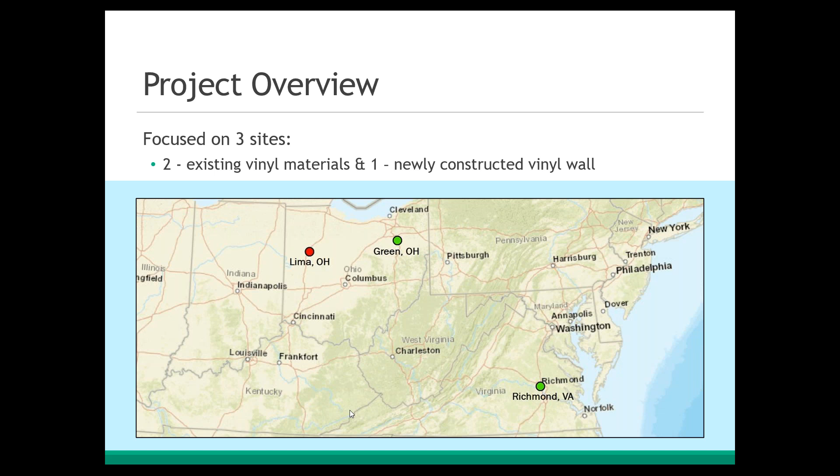So after considering numerous sites, we ended up settling on 3 to focus on for the study. The 2 dots there in green, one was at Green, Ohio, and one was in Richmond, Virginia. They had existing structures made of vinyl materials. And then the red circle there for Lima, Ohio, that was an empty site where we ended up constructing a brand new vinyl noise wall to test out for the project.

So for our research objectives and goals, the primary goal of this study was to evaluate the acoustic effectiveness, cost feasibility, and overall benefits of using vinyl materials as a viable option for noise mitigation.

To accomplish this goal, locally sourced vinyl material was constructed and tested as a noise wall. We picked an ODOT site up in Lima, Ohio, right along I-75. This is a photo of the wall we built, with I-75 at the top of the photo, and you can see a couple of the noise meters there from when we did the acoustic testing.

In addition to acoustic testing in Lima, Ohio, we also tested existing vinyl fences in Richmond, Virginia, which had the same material as what we used in Lima, and in Green, Ohio, which had a different material. Both Richmond and Lima also had nearby concrete walls, so we could get a good apples-to-apples comparison of noise impacts.

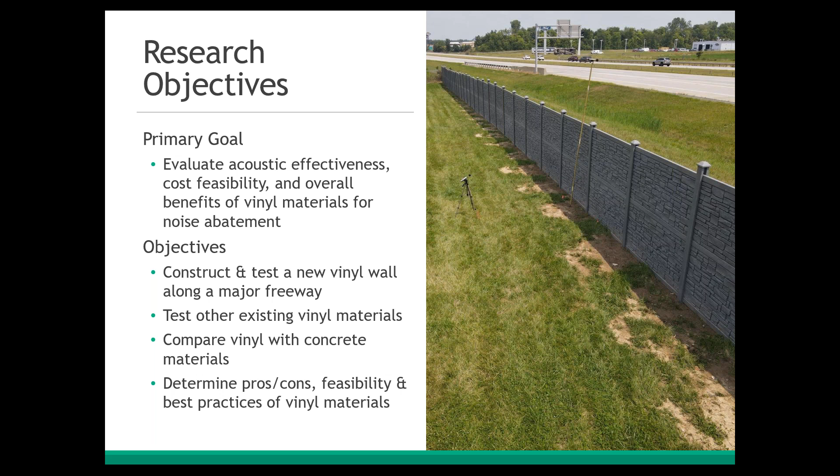These comparisons help determine the advantages and disadvantages of using vinyl materials as noise walls, and helped us gain a better understanding of available vinyl materials and the feasibility of the products for noise abatement. The research also identified some construction best practices when using vinyl materials for noise walls.

Here's a quick overview of the approach we followed. For step 1, project management, that was lots of regular meetings, and today's presentation was part of this step. Then step 2, we did a pretty comprehensive literature search and evaluation of what had been done previously.

Step 3 is where we performed the acoustic testing at the 3 locations, one of which we built the noise wall. Step 4, we performed data analysis and some modeling on the acoustic testing results. Then from all that, we prepared recommendations and conclusions, drafted the report and fact sheet, finalized it, and prepared a research article for ODOT's newsletter.

So those were the major steps that we followed for this project.

Looking a bit more in depth at a couple of these steps, first for step 2, the vinyl material literature search and evaluation: a literature search of existing research was performed to collect information on previous studies on vinyl noise barriers and to identify best practices that could be incorporated into this research project.

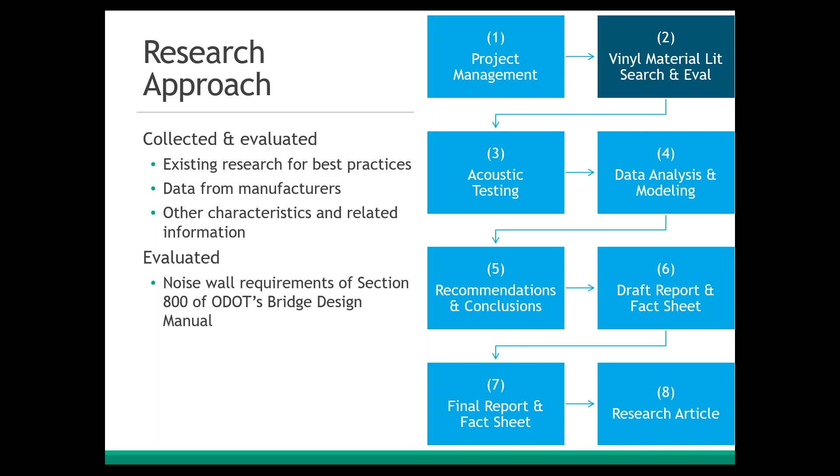Data on the vinyl materials was also collected from the manufacturers, including cost and production time. Additional characteristics and other related information on vinyl materials were inventoried and compared. In addition, we evaluated vinyl material characteristics against the noise wall requirements in ODOT's Bridge Design Manual in Section 800.

For acoustic testing, we split it up into 2 parts. The first one was building the test noise wall, and the second part was the acoustic testing.

When we built the noise wall, first we had to pick a site. We looked at a total of 16 sites around Ohio and evaluated them for construction feasibility. From this evaluation, we picked 2 sites, but after some challenges arose at one of the sites, we ended up building on a single site in Lima, Ohio.

That was an ODOT property, so we had easy access. It was right along I-75, so it was nicely located along a major freeway. That's where we ended up building our noise wall.

Once the vinyl fence materials were manufactured and shipped to the Lima site, the construction contractor installed the vinyl noise wall following the manufacturer's installation specs. Professional construction management services led by Capstone staff, assisted by ODOT and us, documented the installation process, best practices, and challenges observed during construction.

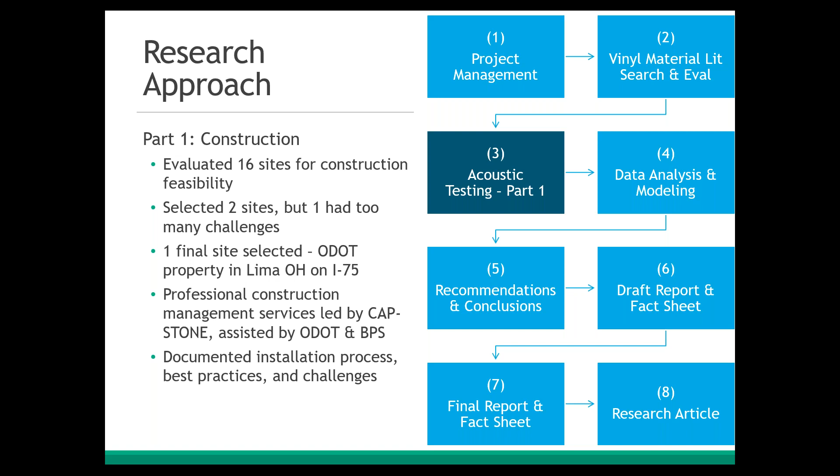Here's just some photos taken during the construction process. First, here's what the panels and posts looked like when shipped to the site. They were shipped in these packages all ready to be assembled. Here's a close-up of that package, showing the posts and the panel support brackets already attached to them.

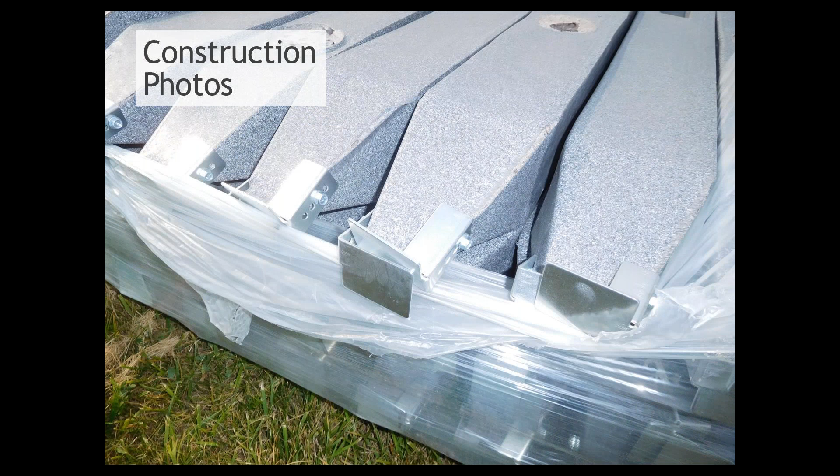Here you can see the very first post has been installed, and on the right side of the photo you can see the auger being used to drill the hole for the next post.

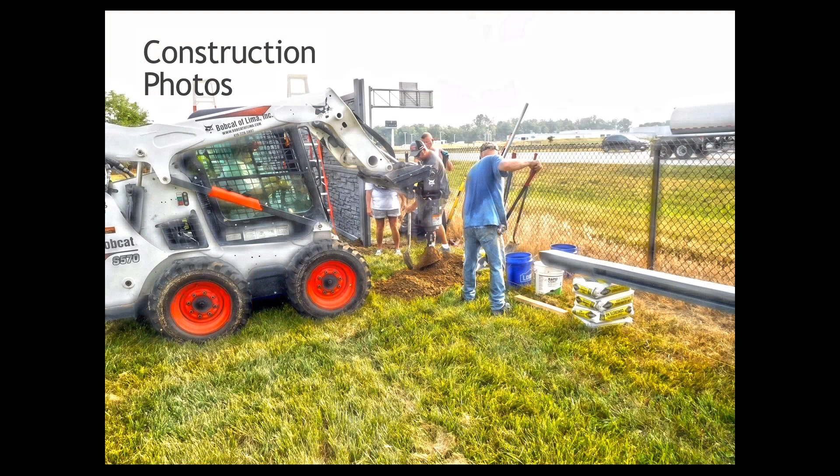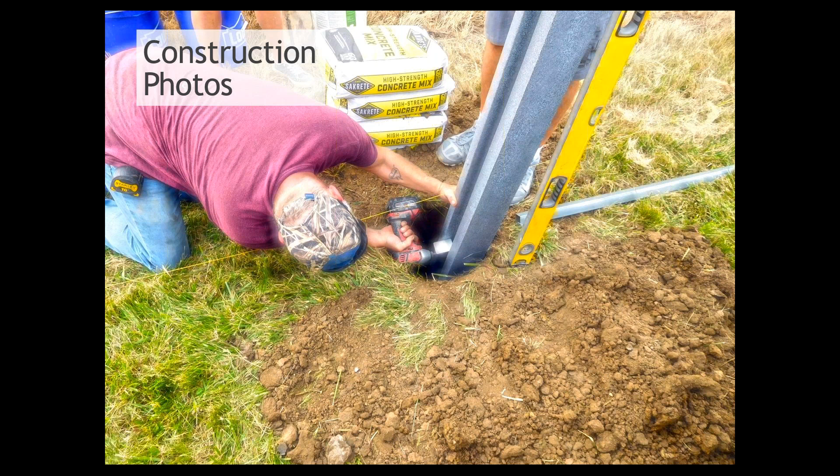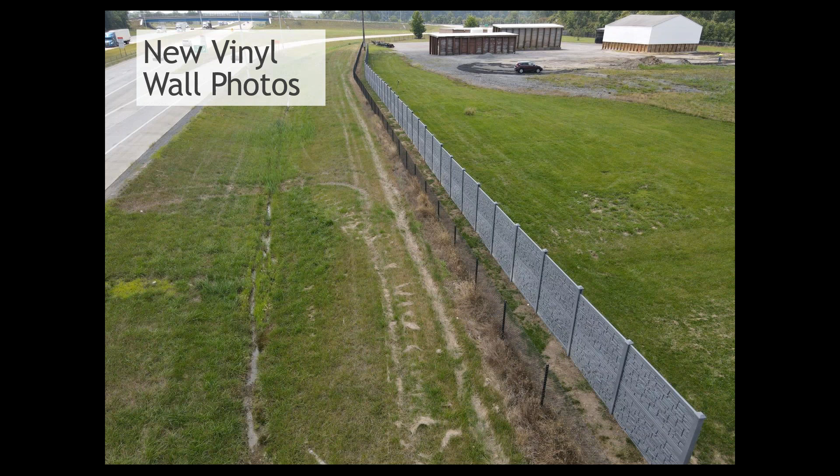Here are a couple of post-construction aerial drone photos we took of the new vinyl noise wall in Lima. The first one, you're looking south, so I-75 is on your left and the ODOT properties are on your right. Here's a second one looking north, with ODOT properties on the left and I-75 on your right.

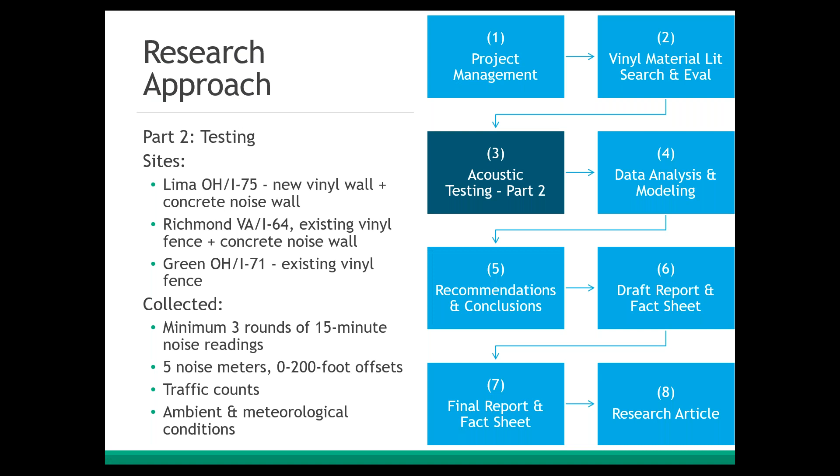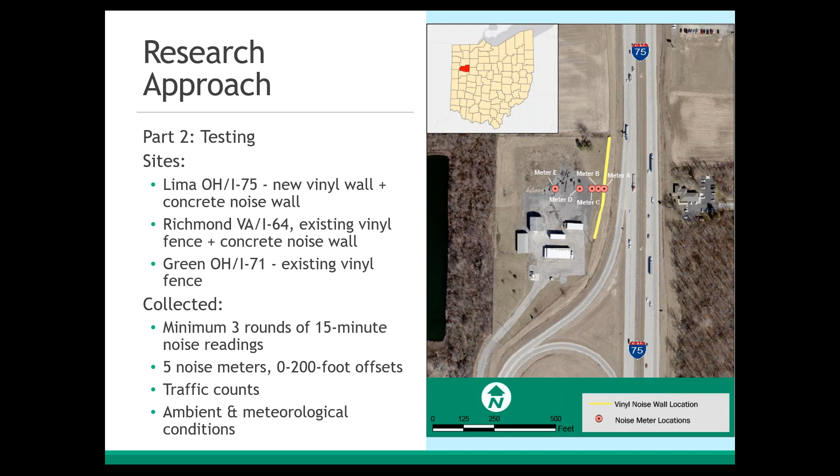For part 2 of our acoustic testing, the testing was performed at Lima, Ohio, along I-75, both before and after construction. You can see the aerial here, the yellow line is the noise wall, and you can see the 5 meters, which we'll talk about in a minute. This was the nearby concrete wall just to the north that we also tested on I-75.

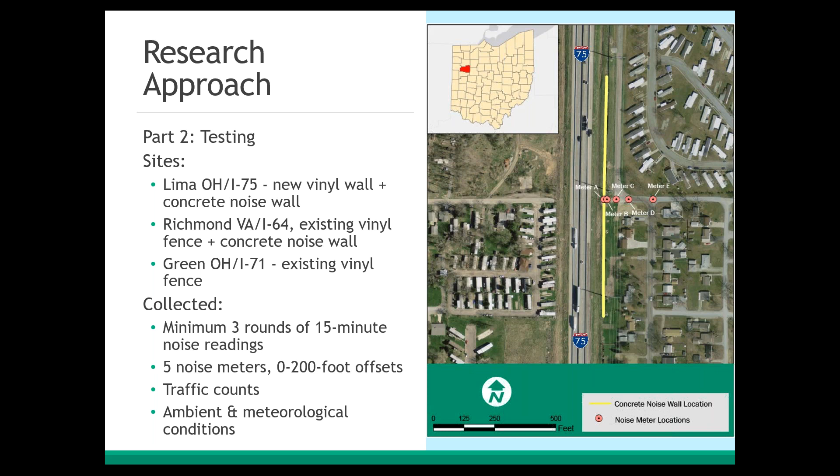In order to gather additional data, we conducted acoustic testing at 2 other locations. We identified an existing vinyl privacy fence in Richmond, Virginia along I-64, and this is the concrete wall a little bit to the south, also on I-64. Then in Green, Ohio on I-77, there was a short vinyl fence at this property—you can see the yellow line is where the vinyl fence was. We also tested a no-wall location just to the north of the property.

We followed ODOT's noise manual and FHWA's noise measurement guidance for the acoustic testing. We prepared noise measurement plans and contacted property owners and respective state DOT staff when needed, in advance of performing the fieldwork and construction activities. In order to gather a meaningful amount of data and account for site and traffic variations that can affect noise readings, each site included at least 3 rounds of 15-minute noise readings.

Going back up here, you can see at this site the 5 meters pretty clearly. We did 5 noise meters at most of the sites, where noise meter A is basically on top of the wall, 5 feet above it. Noise meter B, right here, is 5 feet behind the wall, at the typical 5-foot ground level we normally take readings at. C is 50 feet back at 5 feet above ground. D is 100 feet back, 5 feet above ground, and E is 200 feet back at 5 feet above ground.

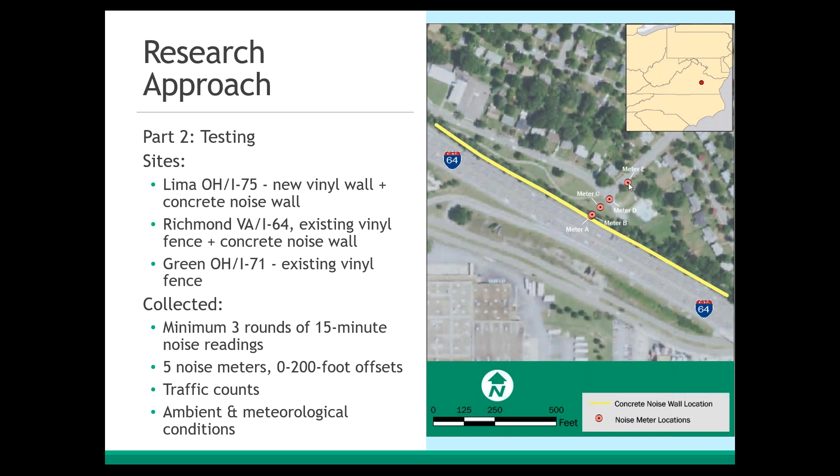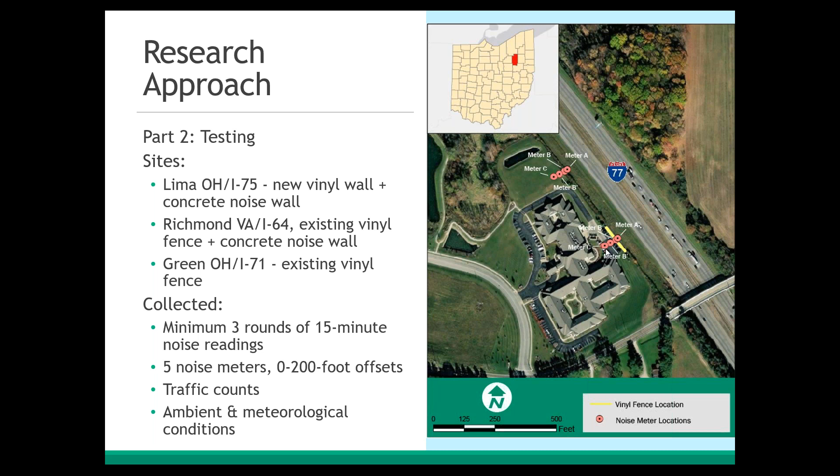The Green, Ohio site was a little more limited because the site was constrained—you can see the building is right here—so we were really only able to go 50 feet back at this site. Traffic counts on the primary roadways, as well as ambient and meteorological conditions, were also recorded during the noise readings.

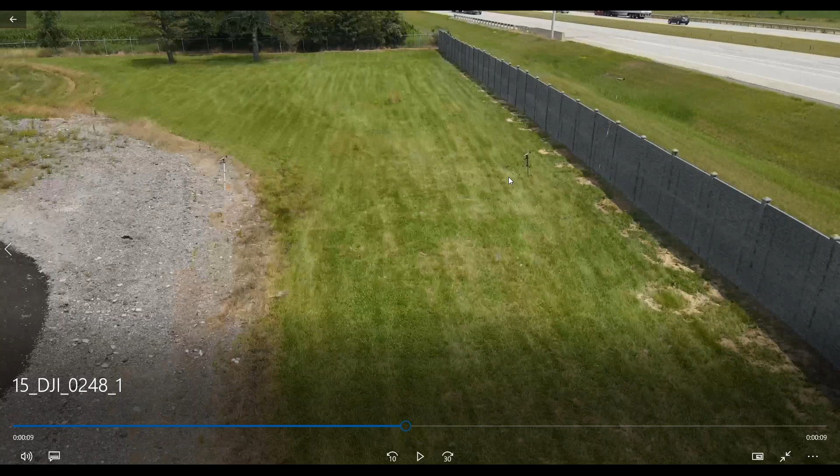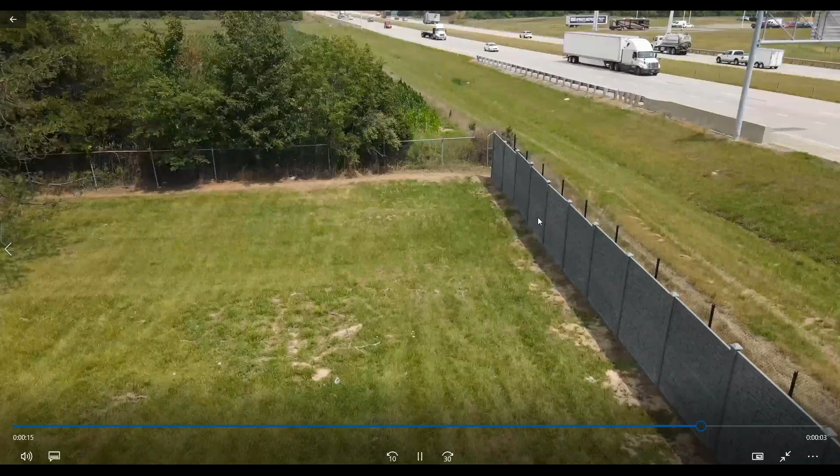I'm going to attempt to play a short drone video we took, just so you can see a little bit of movement here. This is the noise wall we built in Lima, and you can see we're starting to see the noise meters. I'll go back a little bit so you can see them—here's the noise meter on a pole, 5 feet above the wall, and this is noise meter B, 5 feet behind. Then we've got C, and D and E are off screen here, but it gives you a good idea of what the setup looked like when we took the noise readings. Sorry, it's a little choppy—I was afraid that would happen.

So, back to the PowerPoint.

For the next step, the data analysis and modeling step, the results from the acoustic testing were tabulated and we analyzed the data pretty in depth. The data analysis used aggregated and disaggregated noise observations along with TNM noise model predictions to fully assess the acoustic effectiveness of the vinyl materials using multiple methods. The analyses performed included an aggregated drop-off performance comparative analysis, an aggregated difference-in-difference comparative analysis, a disaggregated minute-by-minute descriptive statistical analysis, followed by the TNM modeling predictive analysis, and the cost-benefit comparative analysis. We're going to talk about these more in depth in the next section.

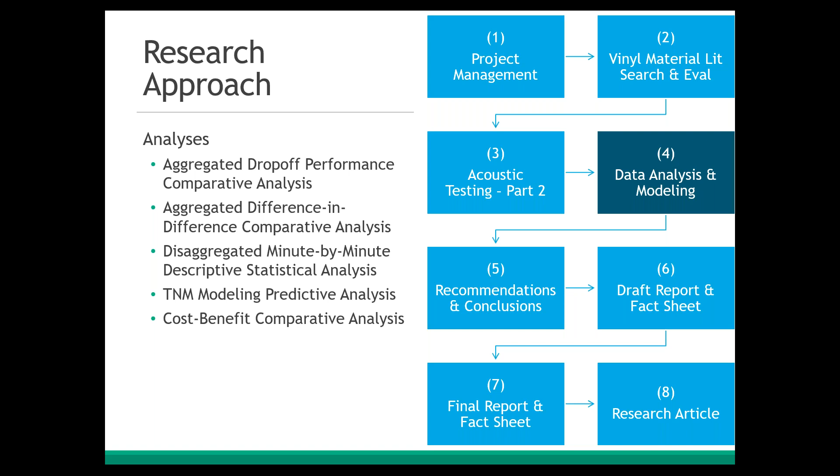After completing the data analysis and modeling, the final steps of the project included these last four steps. For step 5, utilizing the findings and results from previous tasks, recommendations and conclusions were prepared regarding the vinyl materials, including acoustic effectiveness of the materials, information for ODOT's list of approved noise wall types and suppliers, and ideal types of sites for construction of vinyl noise walls. In addition, recommended best practices were prepared for the construction and installation of vinyl noise walls.

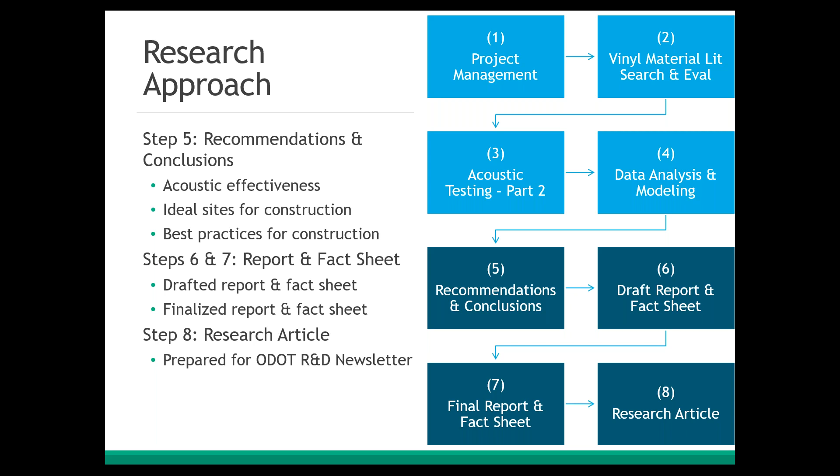For the draft report and fact sheet, we first prepared a draft and had it reviewed both by ODOT staff and a couple other state DOTs. Then we updated and finalized the report and the fact sheet, both of which will be available to download by the end of the week. Paula will send out a link shortly.

The last step was preparing a short research article for the ODOT newsletter.

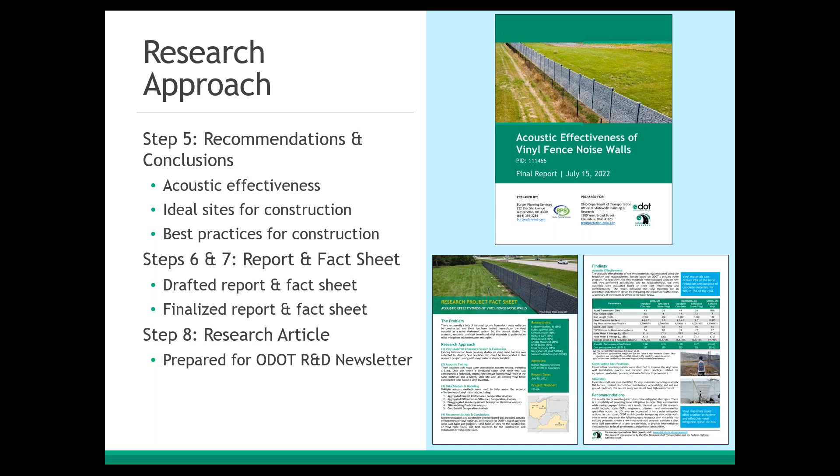Now let's get into the meat of the data here. First, we're going to talk about the empirical data analyses we performed. The first one was the drop-off performance comparative analysis, which involved the noise drop-off performance of various vinyl material, concrete material, and no-wall configurations. The drop-off performance over set distances at the 3 sites was averaged for all 5 noise meters using about 37 field data observations, then evaluated to identify patterns.

We did this for the other sites too, understanding that the walls were already in existence at those sites. So let's look at the results from these 3 sites, in addition to a more in-depth look at the Richmond results.

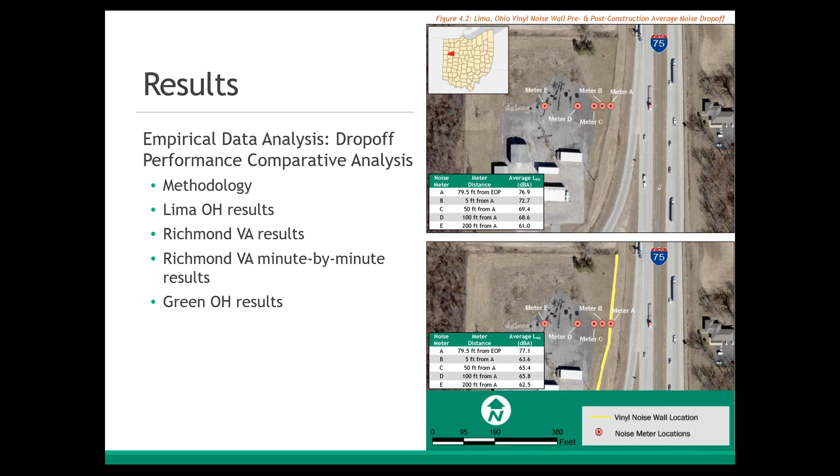This table shows the calculated average drop-off observations over distance where noise reading data was collected. Some of the data was contaminated due to various environmental issues such as birds, cars, and a lovely year for cicadas, if you remember that last year. So we either omitted some of that data or redid our testing, and that's where you see all those subscript letters popping in, where we had those contamination issues.

Looking first at Lima, when comparing the pre and post construction noise levels, there was a large decrease in noise levels from noise meter A to B. The post-construction drop-off was steady from A to E, but wraparound noise, due to the wall being only 400 feet long, most likely affected the results at D and E, since those were further back at 100 and 200 feet.

Looking at the Richmond, Virginia wall, these sites best captured the performance of vinyl materials over distance because the vinyl site had the longest and tallest vinyl privacy fence that we looked at. The other sites at Lima and Green experienced some noise contamination issues. However, this Richmond site did have some contamination issues due to the cicadas, so we actually went back at a later date and took more readings to make up for that.

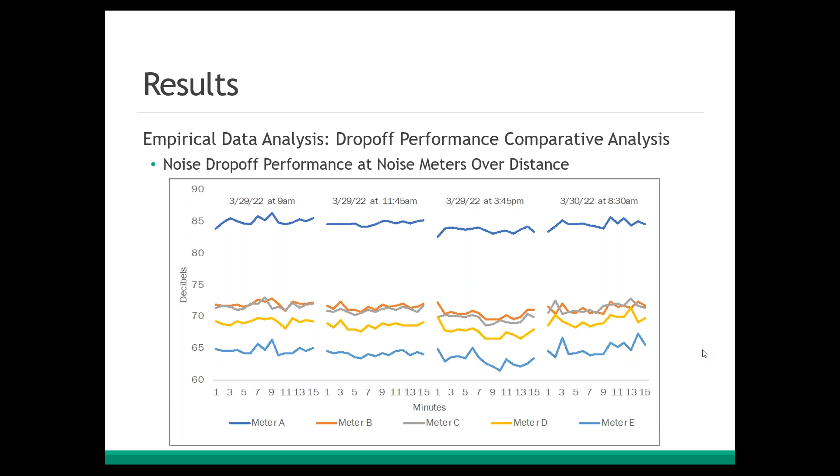Looking at the green site, the drop-off performance couldn't be compared between concrete and vinyl using the collected readings since there wasn't a concrete wall nearby. But the TNM modeling predictive analysis did offer a performance comparison, which we'll discuss in a little bit. However, drop-off patterns for the vinyl fence and no-wall scenarios could still be evaluated. The vinyl fence showed noise reductions from A to B, but noise meter C was likely affected by wraparound noise effects from the short vinyl fence length.

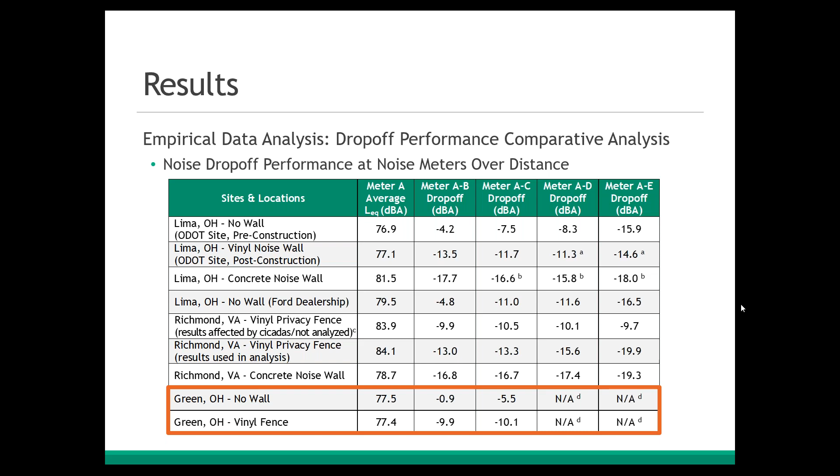For a direct comparative analysis between vinyl and concrete, the methodology of difference-in-difference was employed using 23 field data observations. The difference-in-difference technique captured the difference in noise level reduction for two treatments, concrete and vinyl, as compared to the control condition, which we set as noise meter A, since that was located just above each wall.

And was fully exposed to the road noise without any other contamination. To isolate the traffic noise reduction properties of these different materials, an empirical analysis was initiated by focusing on the aggregate noise readings taken at noise meter A and noise meter B. This focus minimized contamination by ambient noise and decreased the effects of variations in wall height, length, and distance from the edge of pavement, due to the close proximity of B to the different vinyl and concrete structures.

By measuring the difference in noise levels from noise meter A to B for each material type, and then taking the difference between those noise level reductions—i.e. a difference-in-difference—a vinyl performance coefficient was estimated, which is the observed noise level reduction performance of vinyl as compared to concrete. This analysis was able to be performed at Lima and Richmond, as mentioned, because they both had nearby concrete walls.

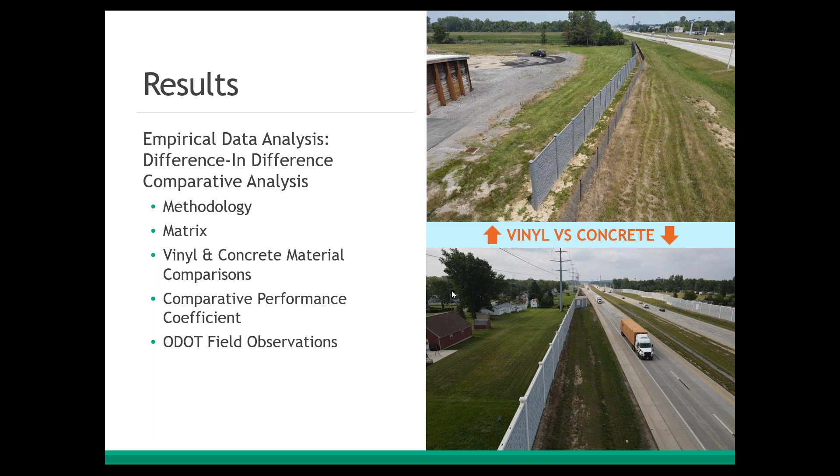The Lima and Richmond locations had the same vinyl materials, or simulated stone, and the Green, Ohio location had a different vinyl material, Tahoe 2. So in Lima, Ohio, the vinyl noise wall material showed a 13.5 reduction in traffic noise from A to B. Richmond had similar performance, reducing noise by 13.0 decibels.

At both Lima and Richmond sites, the concrete materials were more effective at reducing noise levels than the vinyl materials, with an observed average noise reduction from A to B of 17.7 for Lima and 16.8 for Richmond. The vinyl fence for Green, Ohio, although constructed of a thinner vinyl material, still performed well and reduced noise levels from A to B by 9.9 decibels.

So translating that then is the coefficient. To calculate a performance coefficient that directly compares vinyl to concrete, the average noise meter A to B decibel reduction for the vinyl material was divided by the average noise meter A to B decibel reduction for concrete.

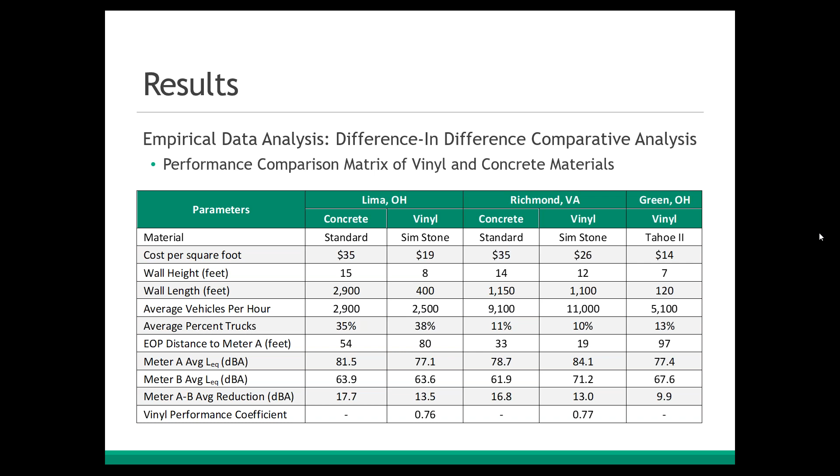One other thing to mention is that ODOT performed some acoustic testing before we did this project. When we looked at their past field work on vinyl materials, we found similar performance for vinyl materials when calculated between A and B. They took readings at various locations around Ohio, including Green, Ohio, and our results were the same. The observations indicated that simulated stone vinyl material outperforms other vinyl materials tested, and our findings were consistent with this study. That was nice to be able to compare and make sure we were on the right track.

Now we're going to move on to the other empirical data analysis we performed, which was a descriptive statistical analysis. We were calling this one internally 'extra credit,' because it gave us a chance to perform a statistical analysis on the data using a larger data set.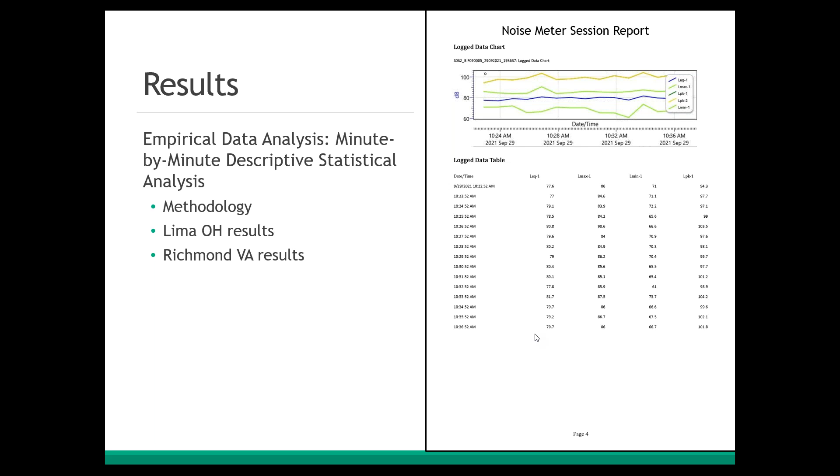We didn't do this for Green, once again, because it didn't have a concrete wall, but we did go ahead and calculate a vinyl performance coefficient for this analysis and compare it with the vinyl performance coefficient from the previous analysis to see how they measured up.

Looking at the results for the Lima, Ohio disaggregated data, these histograms show that the 75 disaggregated minute-by-minute differences in noise levels between noise meter A and B, for both the vinyl and concrete walls in Lima, were actually pretty clean data. On average, the concrete noise wall reduced noise levels from A to B by 17.92 decibels, with a margin of error of plus or minus 0.426 decibels. In other words, inside a confidence interval of 95%, the actual mean noise level reduction falls within 2 standard errors of the sample mean.

By comparison, the vinyl noise wall reduced noise levels from A to B by an average of 13.53 decibels, with a margin of error of plus or minus 0.248 decibels. There's not much deviation here in the data. The calculated vinyl performance coefficient for this minute-by-minute analysis was 0.76, which actually matches exactly and confirms the performance coefficient calculated in the earlier aggregate analysis for Lima.

Looking at Richmond, these histograms show 60 minute-by-minute noise level differences between noise meter A and B for concrete, and 90 minute-by-minute differences for the vinyl privacy fence. On average, the concrete noise wall reduced noise levels from A to B by 16.84 decibels, with a margin of error of 0.732 decibels inside a confidence interval of 95%. The vinyl fence reduced noise levels from A to B by 12.95 decibels, with a margin of error of 0.151 decibels. This was also very clean, and the calculated vinyl performance coefficient of this minute-by-minute analysis was 77%, which is again consistent with the performance coefficient calculated in the earlier analysis.

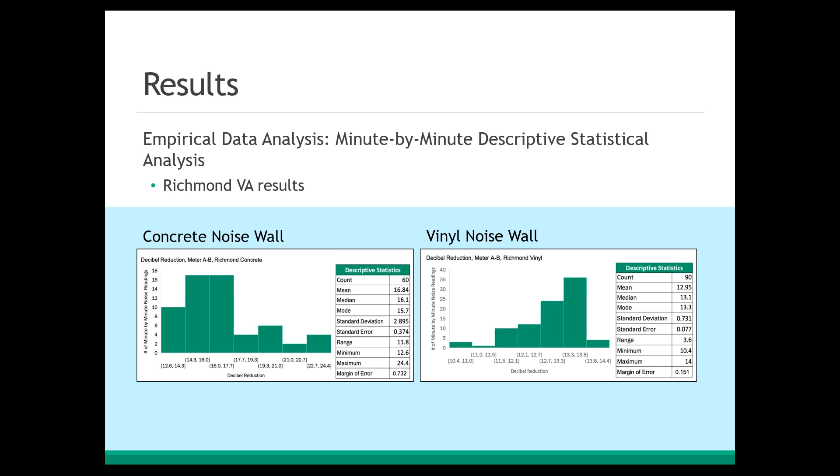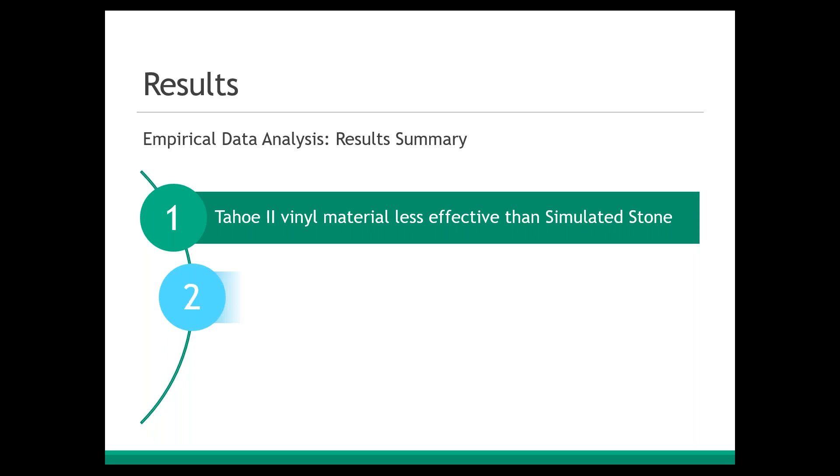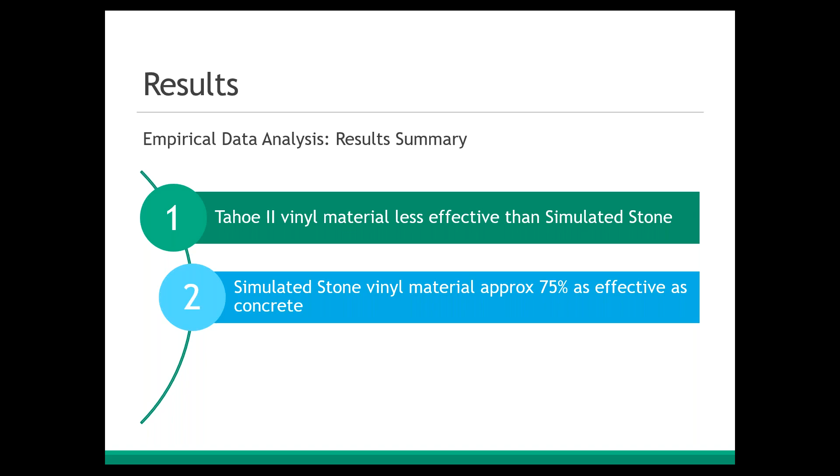Examining the field data across the sites in Lima, Ohio, Greene, Ohio, and Richmond, Virginia, several conclusions can be reached. First, the material used to construct Greene, Ohio, the Tahoe 2, did not achieve the same level of noise reduction performance as the simulated stone material used at Lima and Richmond. Second, the performance of the vinyl materials at Lima and Richmond delivered less noise reduction compared to concrete noise walls, but the materials were still about 75% as effective as the concrete walls. Third, the readings for the Richmond location at the more distant noise meters C, D, and E, where the noise readings were the cleanest compared to the other field locations, indicated that the 12-foot high vinyl noise wall delivered substantial noise reductions across the entire 200-foot distance behind the vinyl privacy fence, even when compared to the concrete wall.

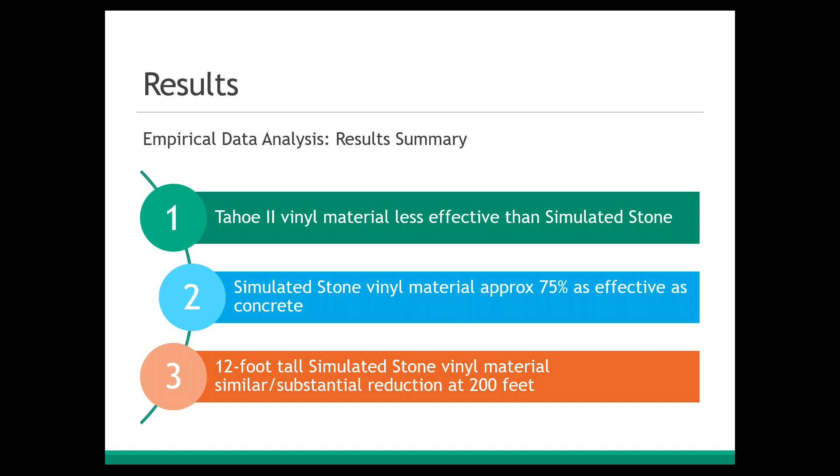All right, so those were all the empirical analyses that we did. Now we're moving on to the predictive analysis that we did using the simulated data generated by TNM models.

This analysis predicted acoustic behavior for 14 receptors at the 3 vinyl material sites: Lima, Ohio with 5 receptors, Greene, Ohio with 4, and Richmond, Virginia with 5.

The receptor points were placed at the same locations as the 5 noise meters we used in the field. This approach allowed for direct substitution of concrete noise walls at the same location as the vinyl materials, while other variables were held constant.

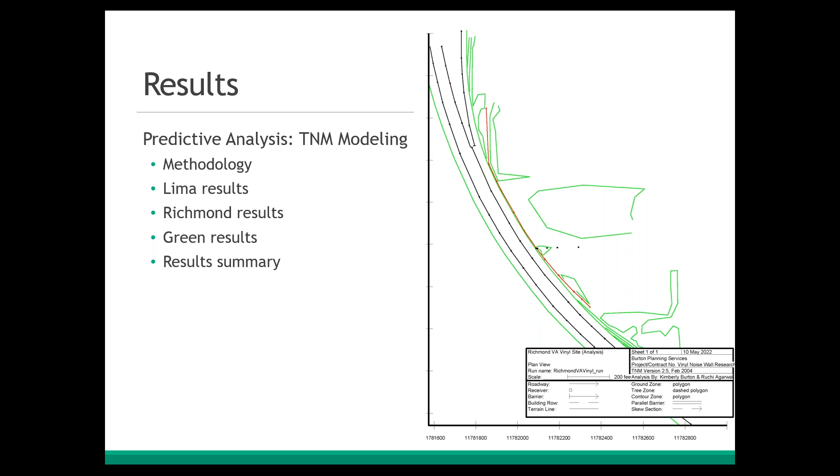The noise models could also calculate the noise levels at all the noise meters without the contamination issues that occurred with many of the noise readings. This approach allowed the research team to approach experimental control.

So let's look at the results of these 3 sites. At the Lima, Ohio location, the vinyl noise wall was constructed at 8 feet, so the concrete wall height was also modeled at 8 feet.

The results show that the 2 no-wall scenarios are similar and are within 3 decibels for all the noise meters except for noise meter E. For the concrete versus vinyl noise wall comparisons, noise meter A was calibrated within 0.1 decibels.

Under these parameters, the model's predictions for the concrete noise wall show a greater noise meter A to B noise reduction, 14.2 decibels, than the vinyl noise wall at 13.5 decibels. The reduction difference is 0.7 decibels between concrete and vinyl, which is actually a smaller difference than we observed in the aggregate analysis, which was 4.2.

In addition, as can be seen with the no-wall results comparison, TNM over-predicted noise levels by an average of 2.7 decibels.

From these results, a modeled vinyl performance coefficient was calculated at 0.95, which is much higher than the 0.76 coefficient calculated for the aggregate analysis.

It's important to note that the percentage of trucks on I-75 was quite high, at 35 to 38%. TNM 2.5 can overpredict noise levels because the software attributes 60% of all traffic noise produced by heavy trucks at 12 feet high.

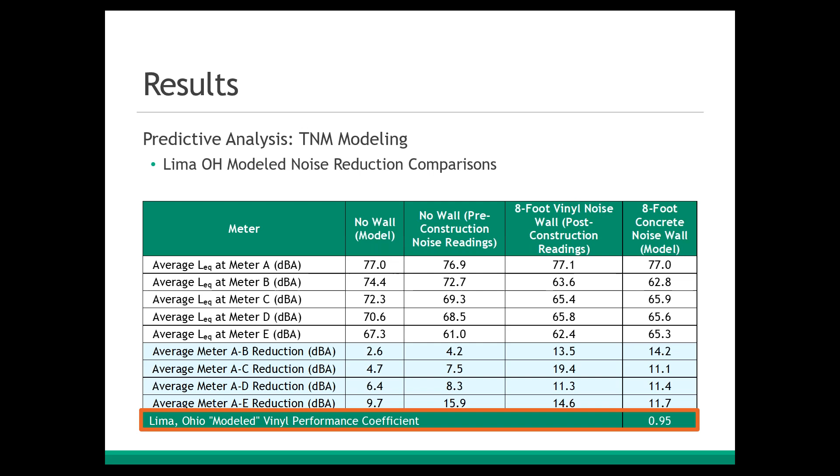At the Richmond location, the vinyl privacy fence was constructed at a height of 12 feet, so that's what we modeled the concrete noise wall height at, and the results show that noise meter A was calibrated within 2 decibels.

Under these parameters, the model's predictions for the concrete noise wall show a greater noise meter A to B reduction at 16.4 decibels than the vinyl privacy fence at 13.0 decibels. This difference of 3.4 decibels is just slightly smaller than the one observed in the aggregate analysis at 3.8.

From these results, a modeled vinyl performance coefficient was calculated at 0.80, which is just a little higher than the 0.77 coefficient calculated in the aggregate analysis.

It's important to note that for this site, the modeled levels were overall less than the measured levels, hence the modeled reductions were overall greater than the measured reductions.

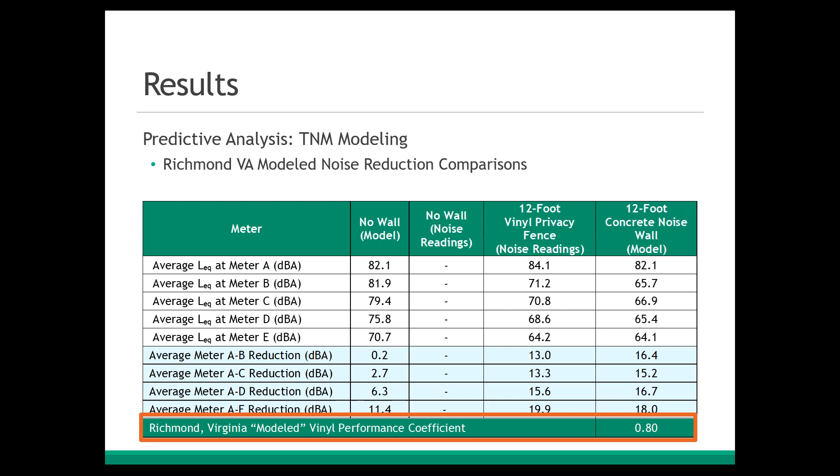At the Green, Ohio location, the vinyl fence was constructed at a height of 7 feet, so the concrete wall was also modeled at 7 feet. The results here show that noise meter A was calibrated within 0.4 decibels.

Under these parameters, the model's predictions for the concrete wall show a greater noise meter A to B reduction at 12.9 decibels than the vinyl fence at 9.9 decibels.

Comparison with the aggregate analysis couldn't be performed because of the lack of an equivalent concrete noise wall at this site. So from these results, a modeled vinyl performance coefficient was calculated at 0.77.

However, as we saw from the other 2 sites, the model performance coefficients seem to be higher than in the aggregate analysis. They were on average 0.11 higher.

So if we reduced the 0.77 by 0.11, we could estimate that an aggregate analysis would put the vinyl performance coefficient at 0.66, which would be expected given the vinyl material at this site being less effective than the other materials. However, more research should be done on this specific material to refine this number with empirical data collected from field testing.

So to summarize the predictive analysis results, the modeled results are broadly consistent with and supportive of the findings from the empirical analyses.

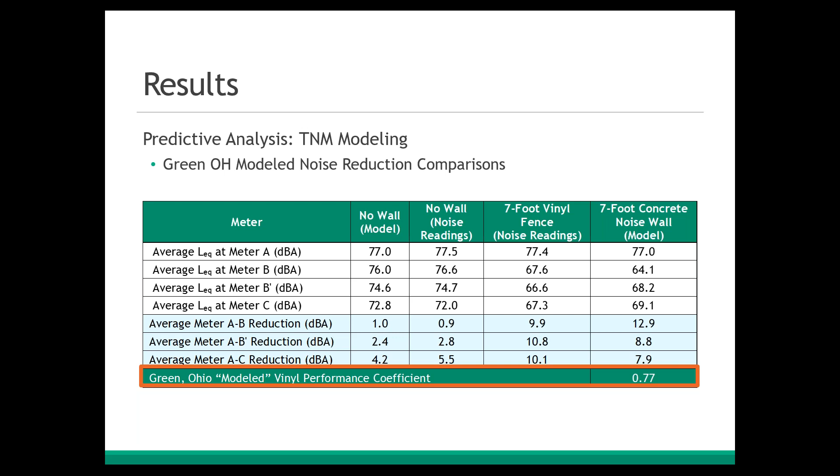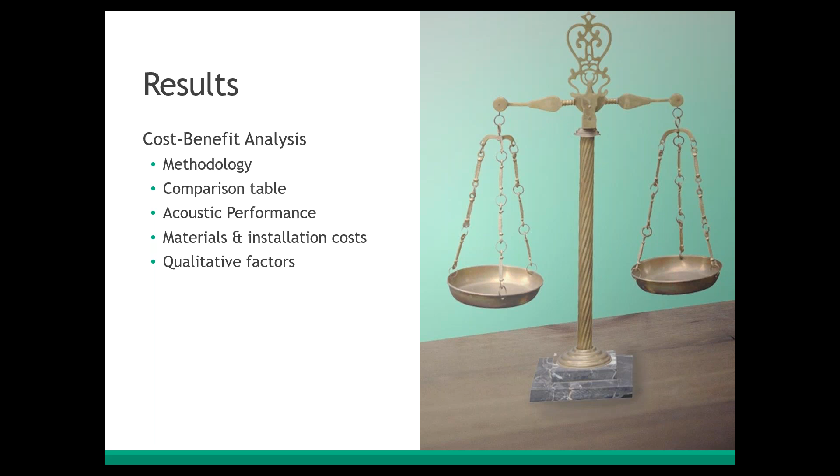So here's our last analysis that we did. We did a cost-benefit analysis. Benefits related to the acoustic performance of the different noise wall materials were identified, and the material and installation costs of the vinyl and concrete walls were documented using data collected for this project and from the manufacturers. Then the cost per square foot were estimated and compared using data normalized for the year 2021. In addition, non-quantifiable benefits and costs were identified for qualitative factors.

This table illustrates the comparative and quantifiable acoustic benefits and costs of the different noise wall materials. The vinyl performance coefficient for simulated stone, which was used at Lima and Richmond, was calculated between 0.76 and 0.77. These coefficients mean that this vinyl material is 76 to 77% as effective at mitigating traffic noise as a standard concrete wall. The Tahoe 2 PVC material, used at Green, is estimated to be less effective than standard concrete wall and the simulated stone vinyl material. The disaggregated minute-by-minute analyses and the TNM modeling predictive analyses supported these findings.

According to the literature search, the ODOT Bridge Design Manual in section 805.1 states that the minimum accepted sound transmission class, or STC, for a reflective noise barrier is 30. The standard concrete wall exceeds a minimum of 30 at 45, and it has a panel thickness of about 4 to 6 inches. The simulated stone vinyl material in comparison is slightly less than the ODOT minimum with an STC of 26, and its panel thickness is about 2 inches. The Tahoe 2 and an additional material called Augusta, which are very similar to each other, don't have published STC data, but their panels are thinner than the others at 0.875 inch, so the STC is likely lower than 26 for them.

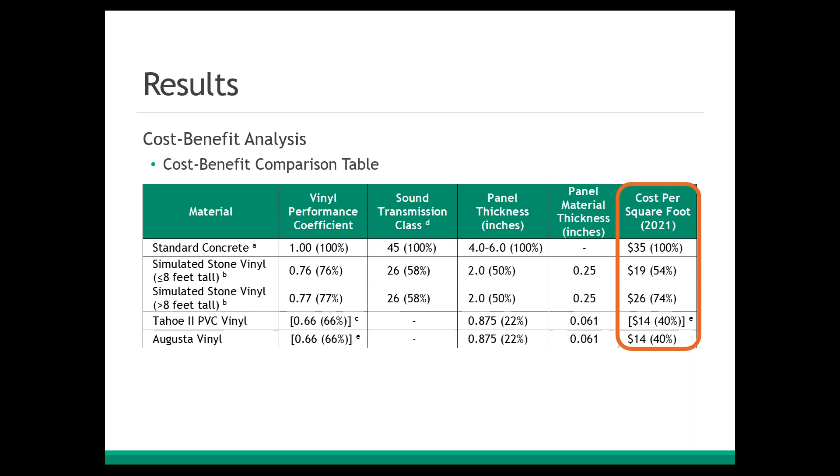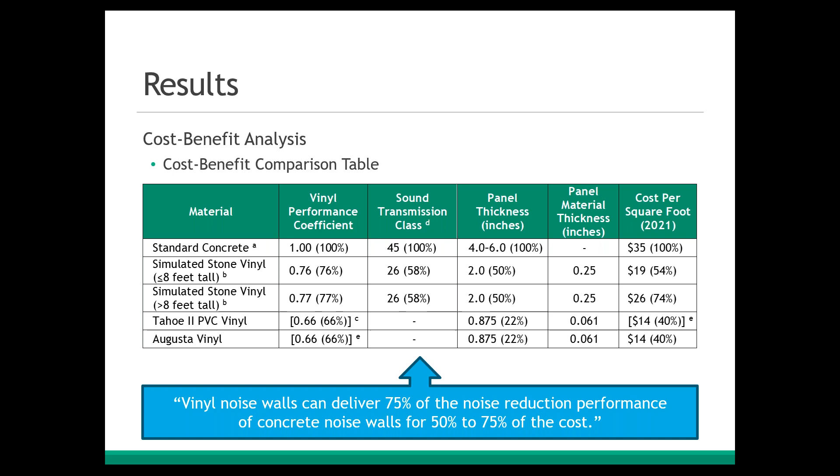So to summarize, this study found that the vinyl noise walls can deliver about 75% of the noise reduction performance of concrete for about 50 to 75% of the cost, depending on the height of the wall.

Lastly, let's discuss some qualitative factors that we considered. There are additional benefits and costs associated with noise wall materials that are not easily quantifiable, but they're still important factors to consider, especially because they may differ between the various noise wall materials. These factors have been identified through the literature searches and the findings of this project and include aesthetics, ease of construction, installation, construction time, cost of repairs, difficulty to make repairs, cost of maintenance, difficulty of maintenance, availability of source materials, durability and longevity of those materials, strength and wind load resistance of materials, and environmental impacts of source materials manufacturing and installation.

Preliminary findings from the study indicate that the vinyl noise walls are quicker and simpler to install and easier to repair and maintain, whereas standard concrete walls are more durable and can resist higher wind loads. When you think about aesthetics, the simulated stone walls can actually look very similar to concrete, but the Tahoe 2 and Augusta materials look more like fences. Potential environmental impacts were outside the scope of study, and so those are currently unknown, but some of the vinyl manufacturers were claiming their products were green, but we weren't quite sure why. All of these qualitative factors may warrant additional study.

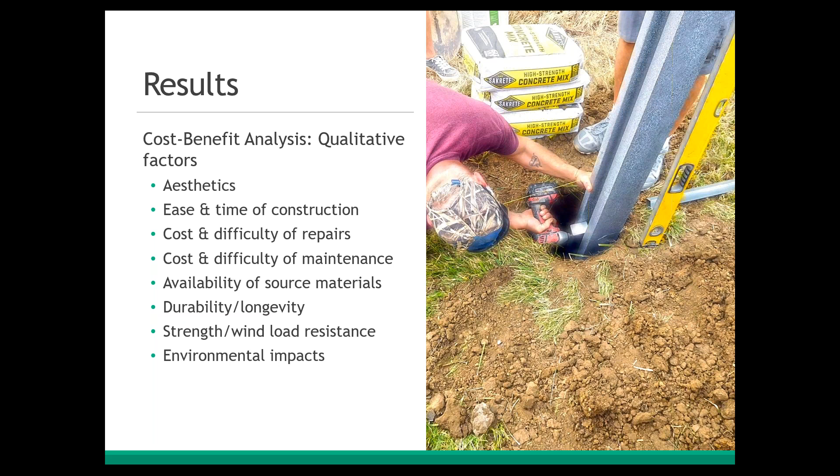So for the last part of our time here, let's talk about the conclusions and recommendations that came out of this analysis and then the implementation ideas.

First was really the main focus of the study: the acoustic effectiveness of the vinyl noise walls. We define effectiveness as the degree to which something is successful in producing a desired result. What we did is we took ODOT's feasibility and reasonableness tests and applied them to vinyl. First is feasibility: how well did the vinyl materials perform acoustically? Did they mitigate noise enough based on ODOT requirements? Second, how reasonable was it to install the walls? Are they cost effective and constructible based on ODOT requirements?

With the simulated stone, it's mitigating traffic noise almost as effectively as standard concrete walls. It's about 75% as effective, even though the STCs are lower than the ODOT minimum. So it's very likely that this vinyl noise wall material could meet ODOT's feasibility requirements for some noise sensitive areas, but probably not for as many areas as concrete walls.

Thinking about reasonableness, the vinyl noise walls are substantially less expensive to purchase and install, but there are some constructability concerns, and they are not as durable as concrete. So recommendations to address these concerns: thinking about comparing the cost, expense and maintenance, it's still going to be cheaper to build and maintain the noise walls, but you still have to think about durability. We're going to talk about the constructability concerns here shortly.

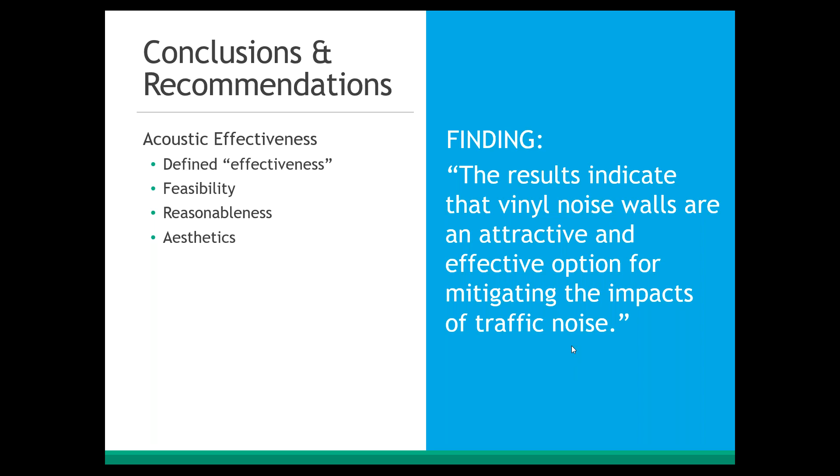So we worked hard to try to figure out what caused the damage, was it wind, was it weather? We talked to the contractor, we talked to the manufacturer, and did some troubleshooting. Apparently, according to the manufacturer and the contractor who've done a lot of these, they've never seen anything quite like it. We talked to two other owners of existing vinyl noise walls around the US, and they said they hadn't really seen this damage before.

So in April of 2022, once things warmed up a bit, we were able to go out there and dig up this part of it and repair it and figure out what was going on. For the posts, we found that the soil was very saturated, well below the ground level, and that indicated poor soil conditions and explained the post and the foundation movement.

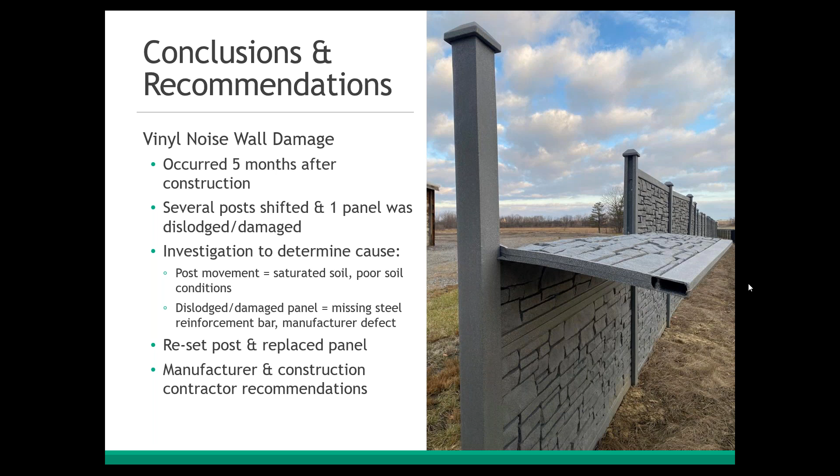So for our construction best practices, we organized them in the report by a few different categories. I'm just going to talk about some of the highlights here today. First, we're going to talk about equipment and material best practices.

We also noticed that the vinyl material really reacts to temperature, so they do expand and contract in extreme heat conditions. So when you're building this, it's probably good to store them in shade and to really monitor them during freeze-thaw cycles if you are in a part of the country that has winter, and see if there's any gaps that occur that you need to address.

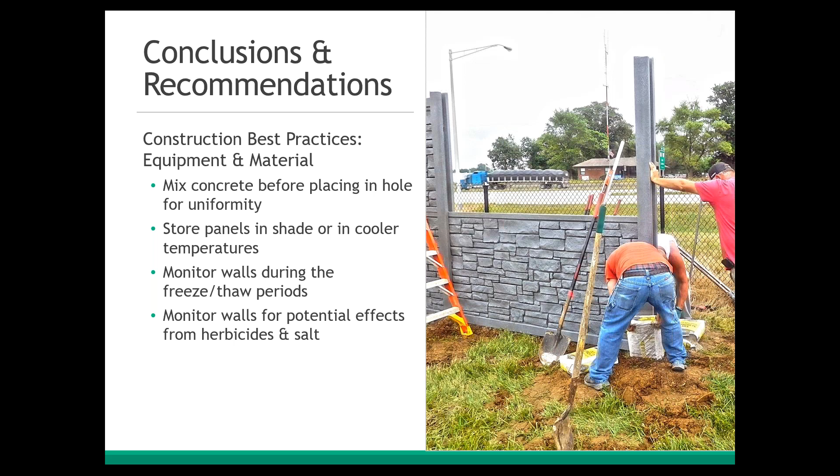In addition, we noted that since herbicides are often used along ODOT right-of-way to maintain vegetation, we're not quite sure what those impacts would be. So it's probably good to either install them away from the edge of pavement or at least monitor any effects, in addition to salt spray applications for the winter months.

For best practices related to process, just a few to highlight here. Each panel has a 4-inch and a 2-inch border along the 8-foot edge of the panel. The 2-inch edge of the bottom panel should butt against the 2-inch edge of the top panel when they're erected. That's per specs, so butting the flat ends next to each other should always be done to help reduce the potential gaps.

And then pre-digging of all the post holes, even though it's more efficient, could compromise the quality of the installation. So it's really better to dig the holes as you put the panels in, just to make sure you're adjusting for the distances properly.

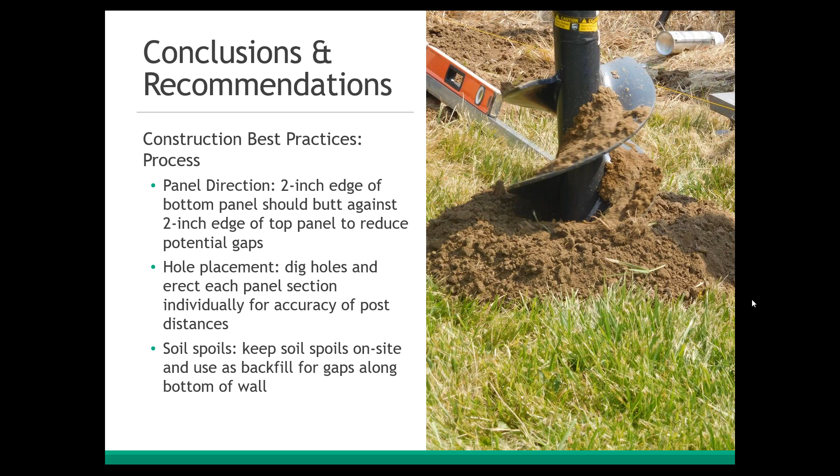And then lastly, for spoils, there were quite a few spoils that came out of the post holes. So it's good just to keep them, and then you can reuse them if there's any gaps along the bottom of the panels on the ground to backfill there.

In addition, we noticed that the top of the panels and posts could be held more consistent if the ground line under the bottom of the panels were actually trenched 4 to 6 inches in advance prior to drilling the post holes.

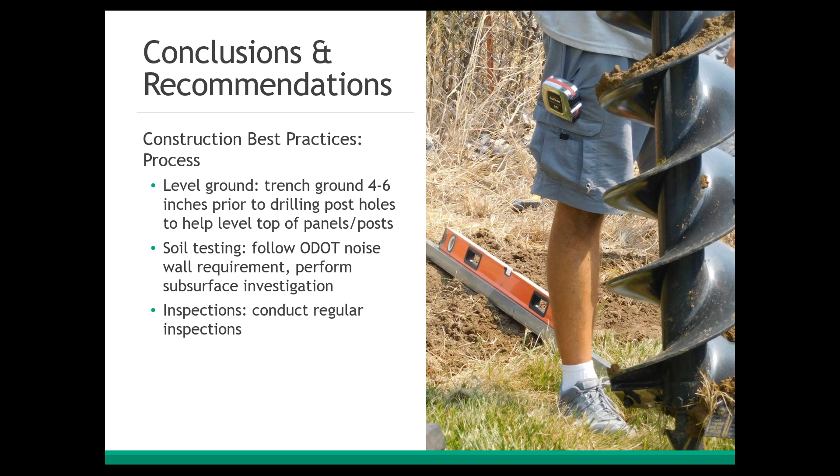And then, although this is really the big one, although the simulated stone manufacturer specs do not include soil testing, ODOT has a requirement that a subsurface investigation be performed for all noise barriers. So we highly recommend that soil testing be performed for vinyl noise walls, even though they're not in the manufacturer specs. And then, of course, regular inspections, especially since this is a newer material, just kind of keeping an eye on it and making sure it's settling okay and standing well.

We actually had some recommendations for the manufacturer too, where we mentioned that we noticed there can be gaps here and there, so looking at maybe more of a tongue and groove fit between the panels versus just laying them on top of each other. We also noticed that there are some burrs left over from the manufacturing process, which had to be shaved down in the field, so having the manufacturer do that in advance would make things more efficient.

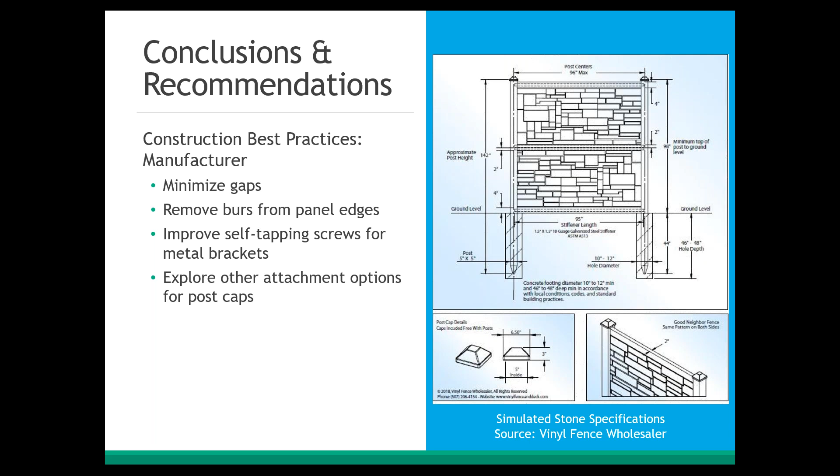We also looked at when putting the brackets in, that the self-tapping screws could have been better designed just to make it more efficient to use them. And then lastly, one of the things we definitely noticed is the post caps. Right now, they're only installed with a friction fit, and it probably would be better if there's some other attachment method that makes them a little bit more secure for wind issues and other issues.

And then we have our ideal sites. This is the last part here where we really tried to look at, especially since we considered so many sites around Ohio to build a wall on, we really wanted to identify what were the best places for these vinyl materials to make them the most successful. So first, finding something that is relatively flat is better. The way the vinyl materials are installed, if the site is at least somewhat flat, it just makes it easier for the installation.

It's also good to avoid sizable obstructions, whether on the surface, underground, or above ground, which is typical for regular noise walls but still worth mentioning. I use this photo so you can see the right-of-way fence on the left of center, and the wall we built on the right. It was important that we left sufficient space between the noise wall and the right-of-way fence so maintenance was easy.

We initially recommended that the vinyl noise wall shouldn't be constructed too close to the roadway, to prevent roadway debris, snow, herbicides, and salt spray from damaging the wall. But it turns out the Richmond, Virginia wall was constructed on the edge of shoulder behind guardrail about 9 years ago, and it's still in really good condition.

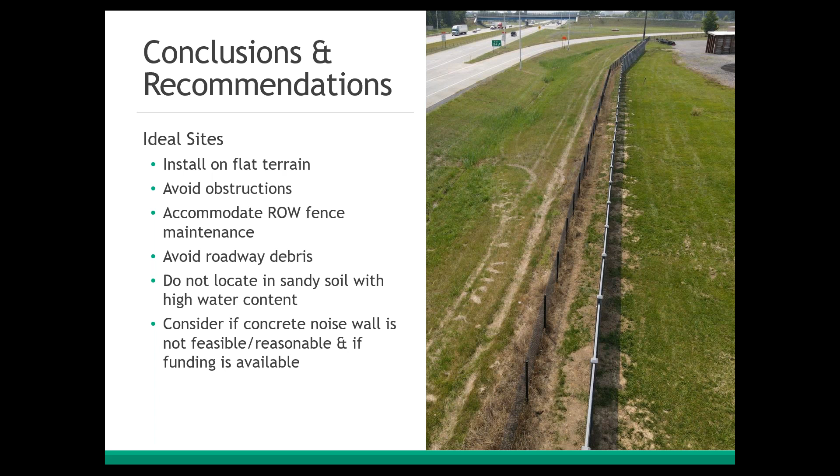So we may not need to worry about that as much. Considering what happened with this site, the vinyl noise wall really should not be constructed in sandy soil with high water content, as determined by soil testing prior to construction. Also, if other ideal site conditions are met and the vinyl noise wall is feasible and reasonable, but the concrete wall is not during a traditional noise analysis, then the vinyl noise wall should be considered as a viable option for noise mitigation if there's appropriate funding available.

So we'll talk a little about implementation. The results of the research can be used to guide future noise mitigation implementation strategies, because it offered ODOT a better understanding of available noise materials and their feasibility for noise abatement. In the future, there's the possibility of offering more communities less costly noise mitigation options, providing more options to more people while potentially saving taxpayer dollars. As a result, end users for this research could be other state DOTs, engineers, planners, and environmental specialists across the US interested in more noise mitigation options.

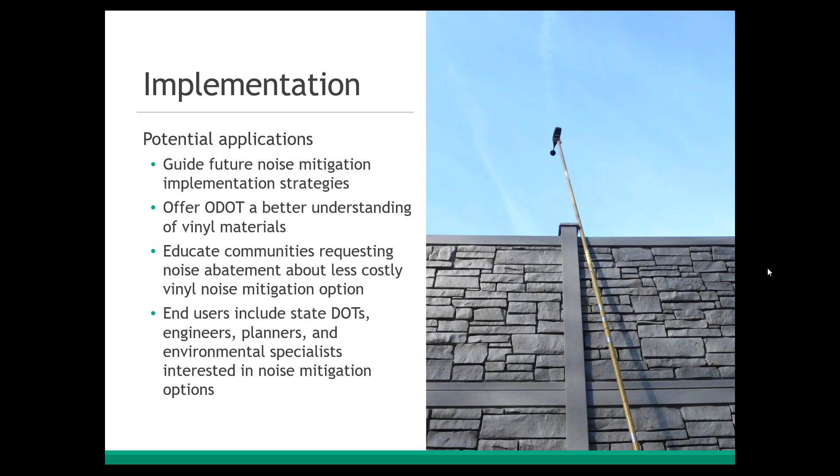For further research, a few things we identified: more testing could be conducted to determine the STCs for the Tahoe 2 and Augusta vinyl materials. It could also be useful to research the comparative life cycle impacts on the environment between vinyl and concrete. It could be beneficial to continue studying the vinyl noise wall constructed at Lima to monitor its continued performance and durability. In addition, installing more noise walls in different locations made from different vinyl materials could allow for more testing. Lastly, it would be helpful if TNM could model different noise wall materials, so additional research could be performed to study a vinyl material option in TNM.

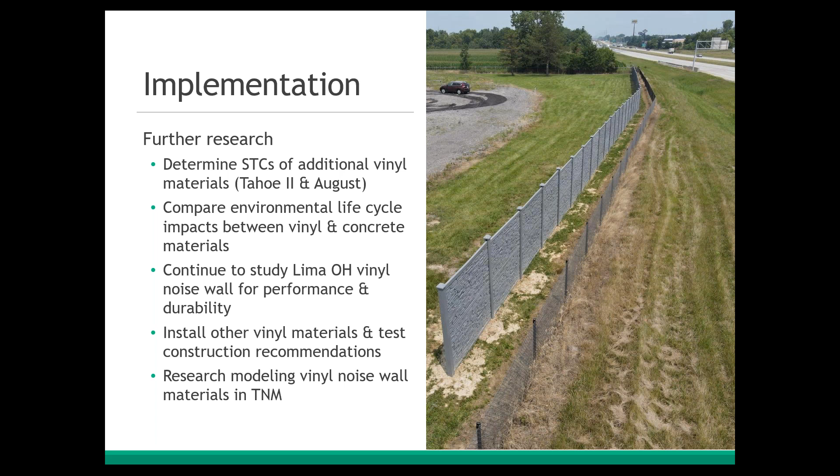We came up with 4 possible integrations for ODOT's noise program. First, one option would be integrating into ODOT's existing noise program: ODOT could approve the simulated stone material as an approved noise mitigation material, update their bridge design manual to permit its use meeting certain standards, and offer it as an option to the type 1 and 2 programs, with a lower cost per square foot but also a factor to reduce acoustic effectiveness at the receivers by about 75 to 80%. However, consideration of the more effective concrete noise wall should still be given priority before vinyl noise walls, so there aren't concerns about people getting lower quality or less effective walls.

We also talked about maybe a new program, separate from the type 1 and 2 programs but supplementing them. That could be almost like a second chance program for noise sensitive areas that don't qualify for type 1 and 2 options, but we'd need funds set aside for that kind of program.

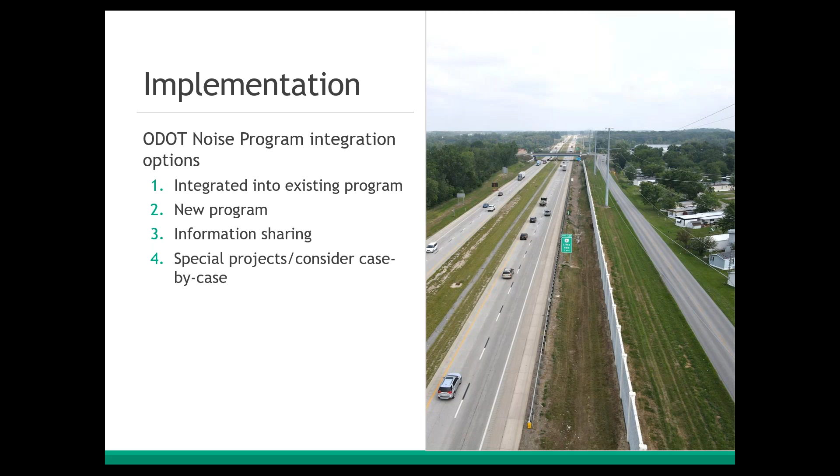Another option is ODOT could choose to offer the vinyl material information for local communities and neighborhoods to consider for themselves, even if they don't qualify for type 1 or 2, since these are pretty easy to construct. And lastly, for special projects, ODOT could elect to use vinyl fence noise walls on a case-by-case basis for a type 1 or 2 project.

All right, so to wrap up, today we covered quite a few things. We talked about what this project was, what our objectives and approach were, what the research results ended up being, our conclusions or recommendations, and then some of our ideas for implementation.